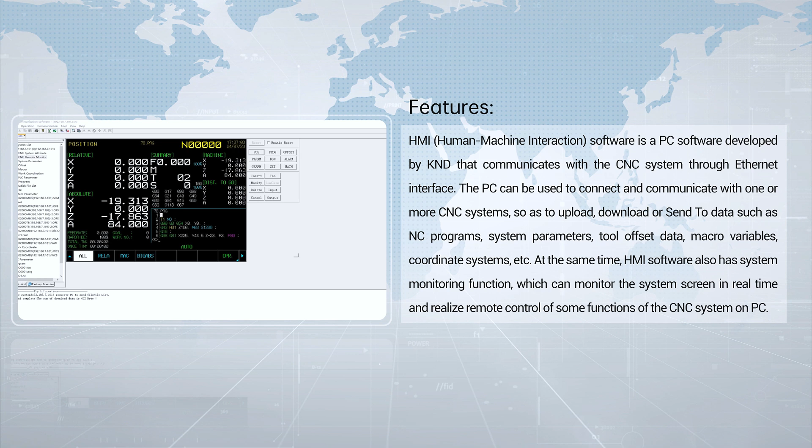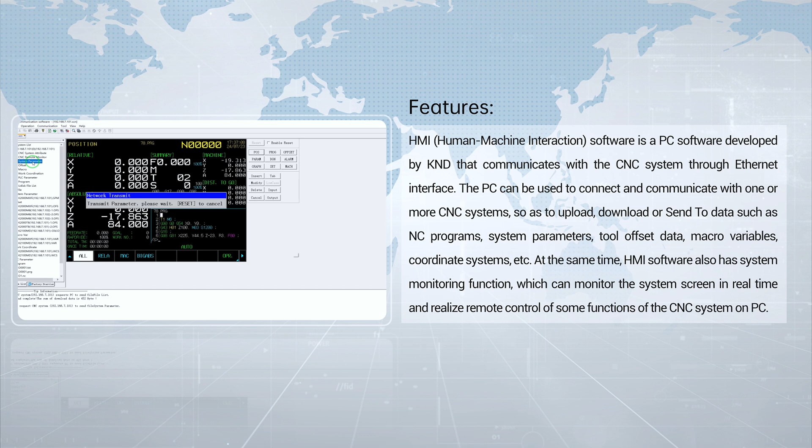HMI software is a PC software developed by KND that communicates with the CNC system through Ethernet interface. The PC can be used to connect and communicate with one or more CNC systems, so as to upload, download or send data such as NC programs, system parameters, tool offset data, macro variables, coordinate systems, etc.

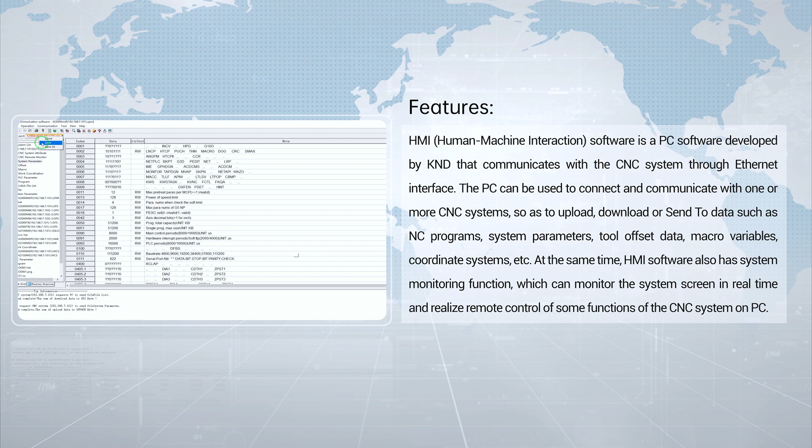At the same time, HMI software also has a system monitoring function, which can monitor the system screen in real time and realize remote control of some functions of the CNC system on PC. This video mainly explains how to establish communication between the PC and the CNC system through Ethernet, and use the HMI software to transmit system data.

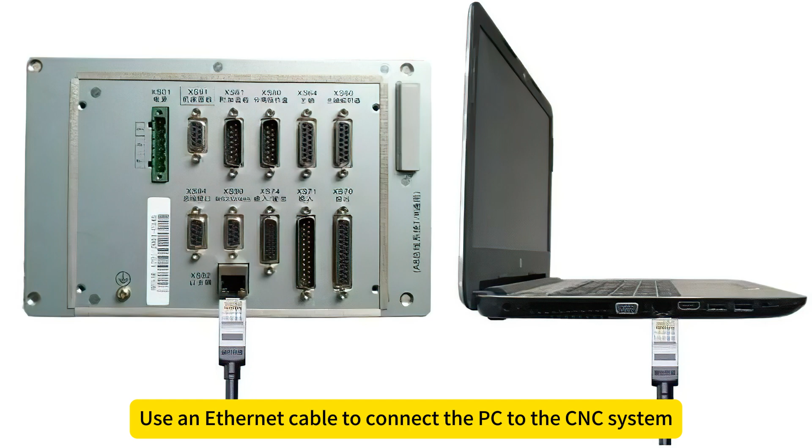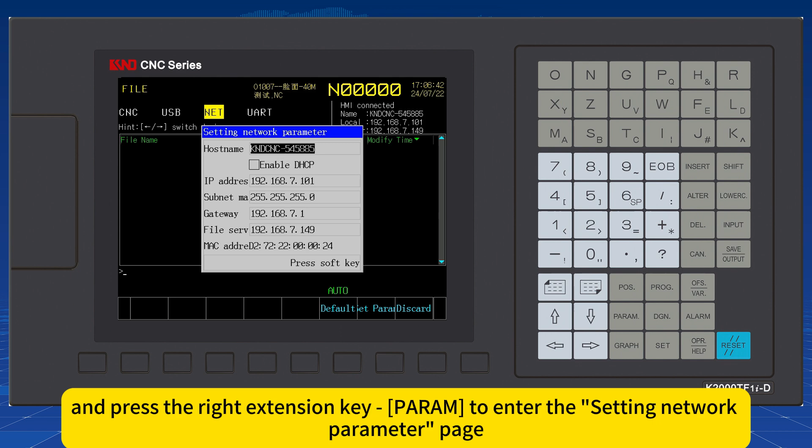Use an Ethernet cable to connect the PC to the CNC system. On the CNC system side, press PROG, file keys in sequence, then press device or the right cursor key to switch to the net page, and press the right extension key, param, to enter the setting network parameter page, where you can see the CNC system default network communication parameters.

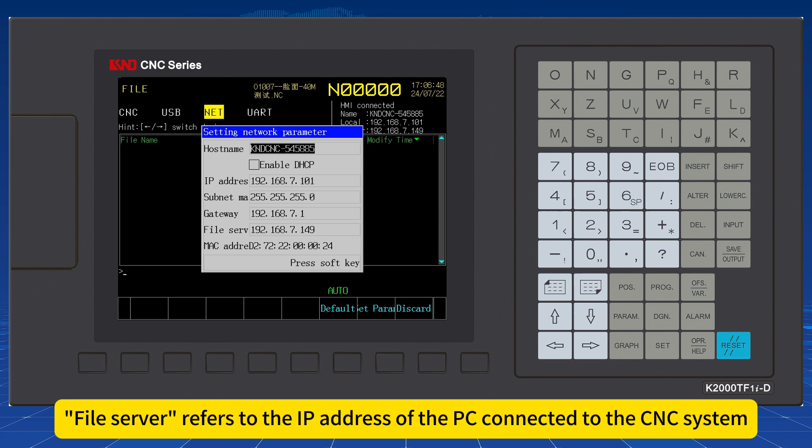Among them, IP address refers to the IP address of the CNC system. File server refers to the IP address of the PC connected to the CNC system. Enter the PC control panel, click Network and Internet, Network and Sharing Center, Ethernet. Click Properties in the pop-up Ethernet Properties window. Find Internet Protocol Version 4 on the pop-up page.

Note: 1. When the PC and CNC system are connected through a router, the PC can be connected to the router via Wi-Fi, and the CNC system should be connected to the LAN port of the router via an Ethernet cable, but cannot be connected to the WAN port. 2. When the PC and CNC system are connected to the router via Ethernet cable, they must all be connected to the LAN port of the router and cannot be connected to the WAN port.

3. The IP addresses of the PC and the CNC system must be in the same network segment, but they cannot be the same. 4. The IP address of the PC must be consistent with the IP address set in the file server on the CNC system side. 5. The subnet mask and gateway set in the PC and CNC system must be consistent.

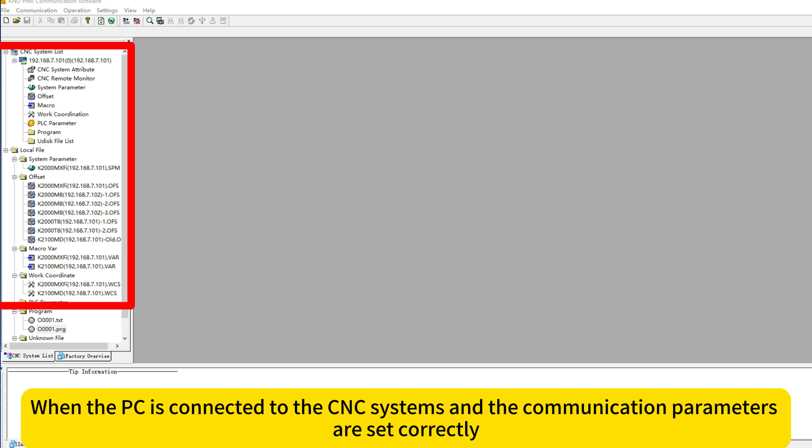After running the HMI software for the first time, when the PC is not connected to the CNC system, the CNC system list in the left workplace is empty and only local file is displayed. When the PC is connected to the CNC systems and the communication parameters are set correctly, the IP address of the connected CNC system will be automatically displayed in the CNC system list in the left workplace.

The CNC system with IP address 192.168.7.101 has been successfully connected to the PC HMI software. Right-click the IP address and you can select to rename the CNC system as you wish.

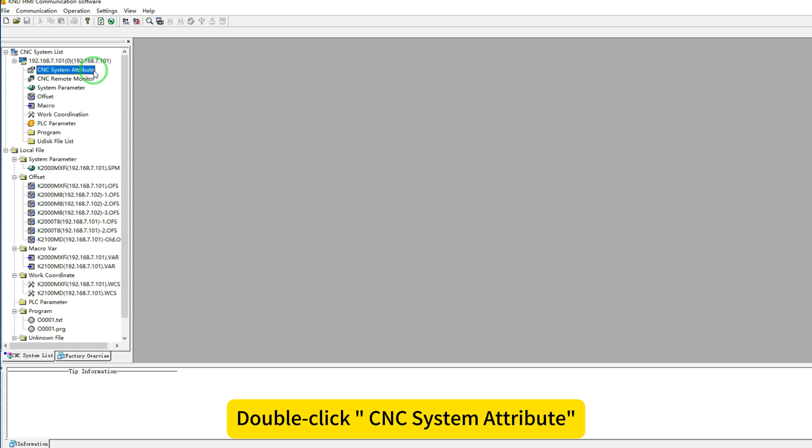Each connected CNC system contains the following items as follows. CNC system attribute. Double-click CNC system attribute. The software will pop up the CNC system status info dialog box as shown below, which will display the CNC type, software version, connection status, and IP address of the currently connected CNC system.

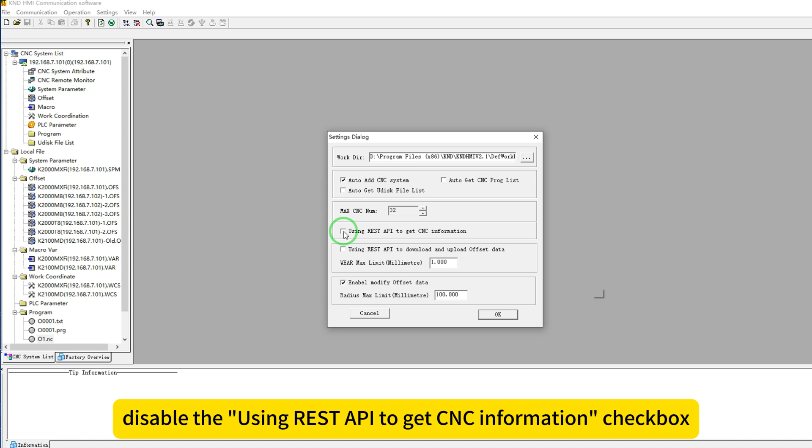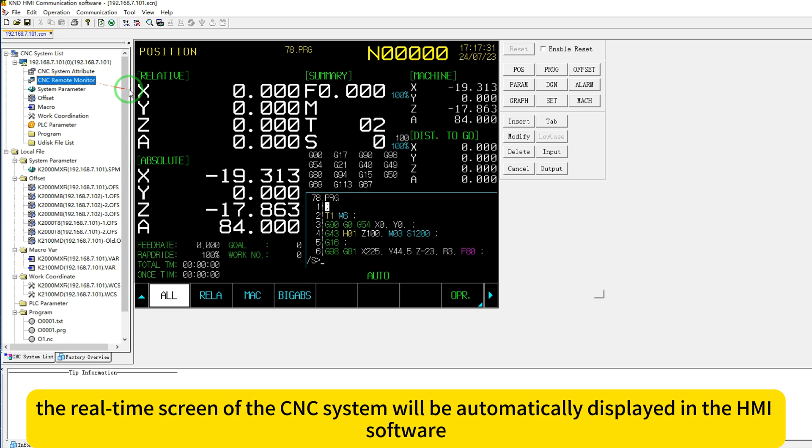CNC remote monitor. Click Settings, Settings in the menu bar to open the settings dialog of the HMI software, disable the Using REST API to get CNC information checkbox, and then click OK. At this time, double-click CNC Remote Monitor. The real-time screen of the CNC system will be automatically displayed in the HMI software, and some buttons will be displayed on the right of the screen.

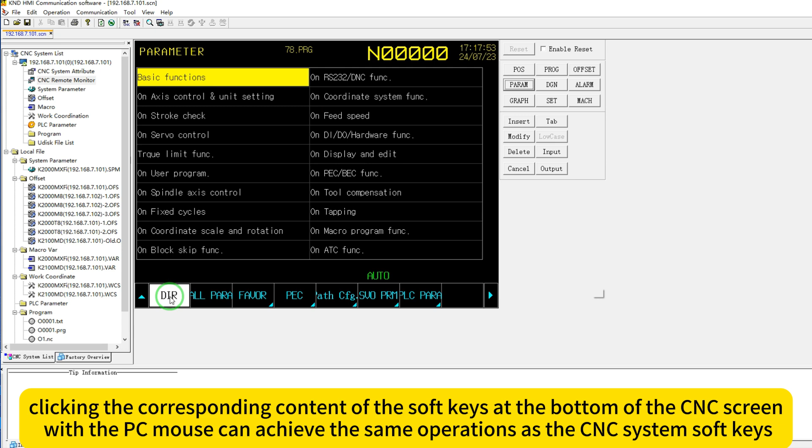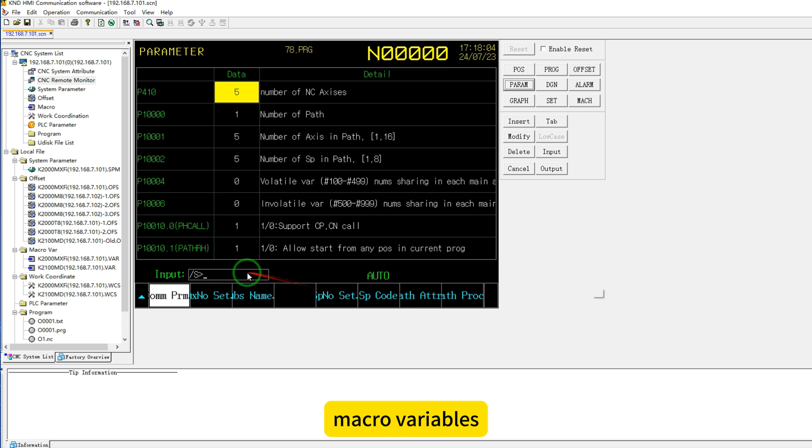The functions of these buttons are the same as those of the corresponding buttons on the MDI panel of the CNC system. Clicking the corresponding content of the soft keys at the bottom of the CNC screen with the PC mouse can achieve the same operations as the CNC system soft keys. At the same time, matching with the PC keyboard, you can view, edit and modify the machining program, parameters, offset, macro variables, coordinate system, ladder diagram, and other operations in the system through the HMI software.

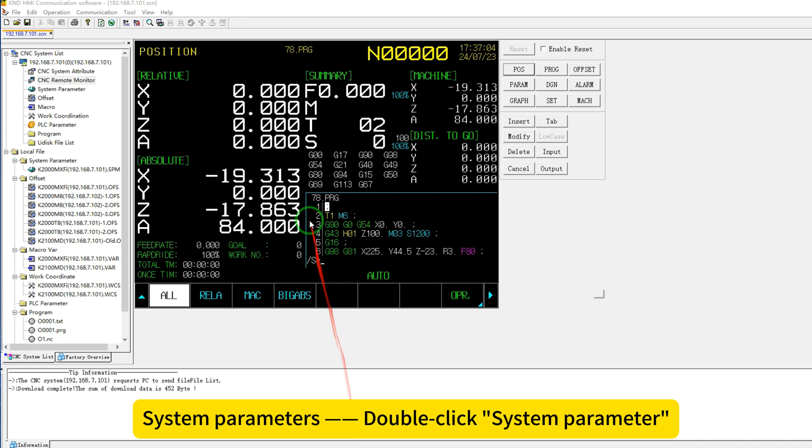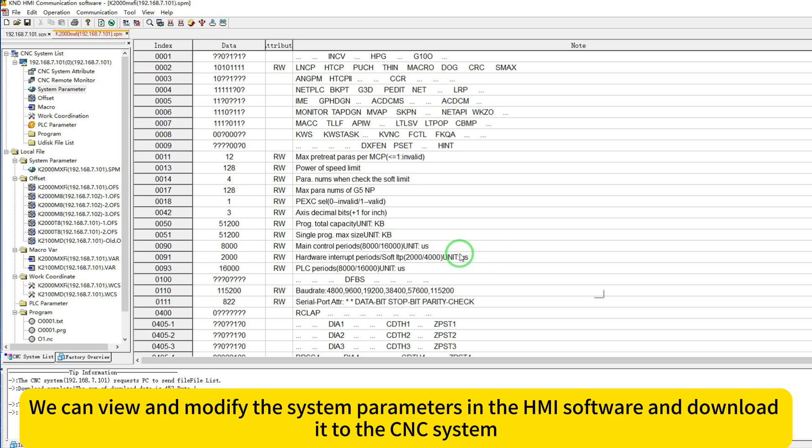System parameters. Double-click System Parameter. The system automatically uploads the system parameters to the HMI software and opens it. The suffix of the system parameter file is .SPM. We can view and modify the system parameters in the HMI software and download it to the CNC system. Right-click the system parameter file and you can select Close, Save or Save As.

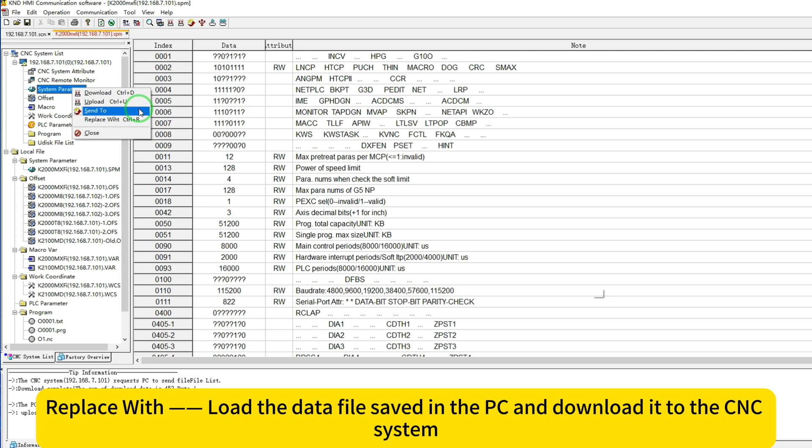Right-click System Parameter in the workplace, and in the pop-up dialog box, you can select Download, Upload, Send to, Replace with, and Close. Download: send data files from the PC to the CNC system. Upload: send data files from the CNC system to the PC. Send to: send data files from the PC to other CNC systems in the same network. Replace with: load the data file saved in the PC and download it to the CNC system. Close: close the data file in the HMI software.

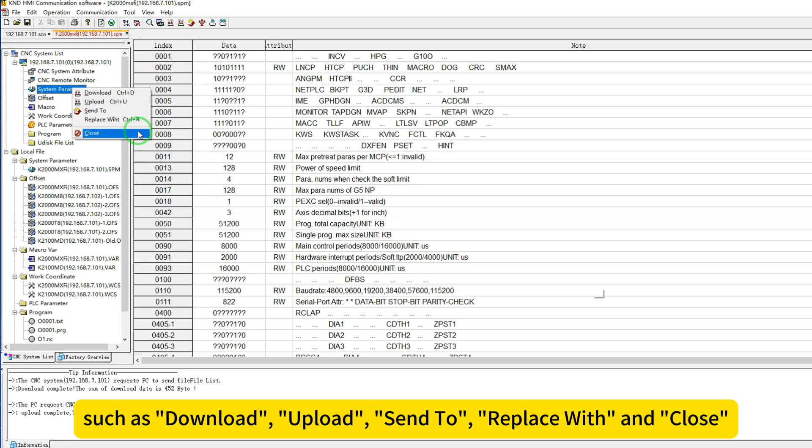The operations of offset, macro, and work coordinate are the same as those of system parameter, and all support operations such as download, upload, send to, replace with, and close. PLC parameter: reserved function, not supported yet.

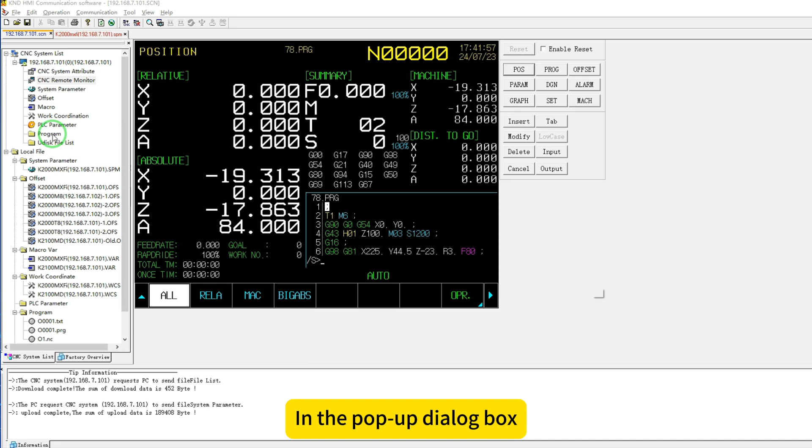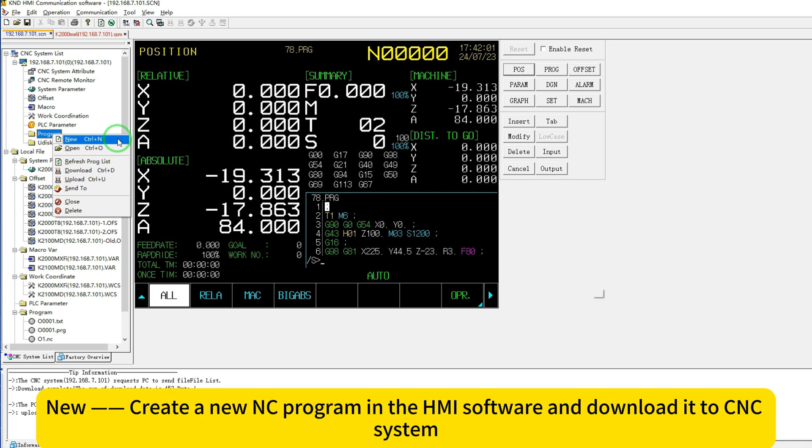Program. Right-click the program in the workplace. In the pop-up dialog box, you can select New, Open, Refresh Prog List, Download, Upload, Send to, Close, and Delete. New: create a new NC program in the HMI software and download it to CNC system. Open: open the NC program saved in the PC and download it to CNC system.

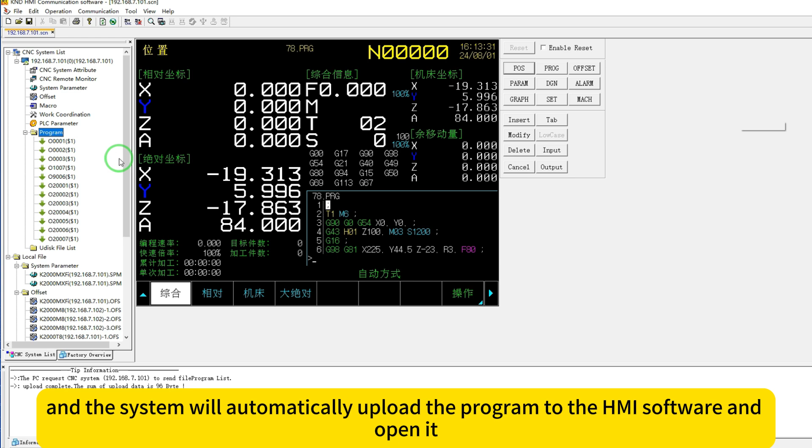Refresh Prog List. After clicking Refresh Prog List, all NC programs in the CNC system will be displayed in the program directory. Double-click any program with the mouse, and the system will automatically upload the program to the HMI software and open it. Delete: used to delete the program in the program directory.

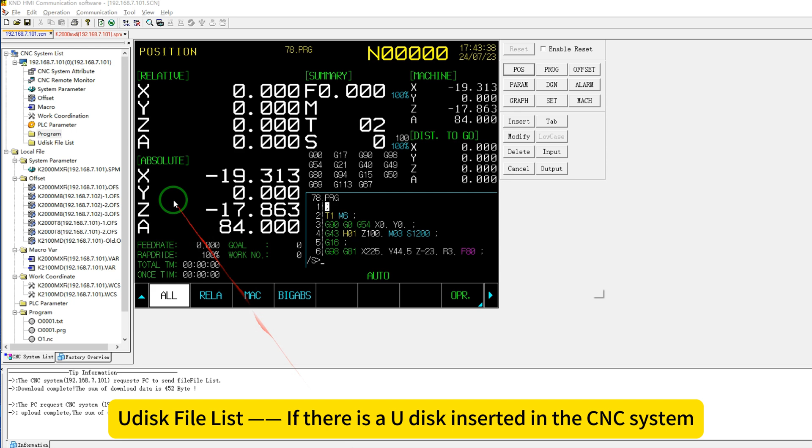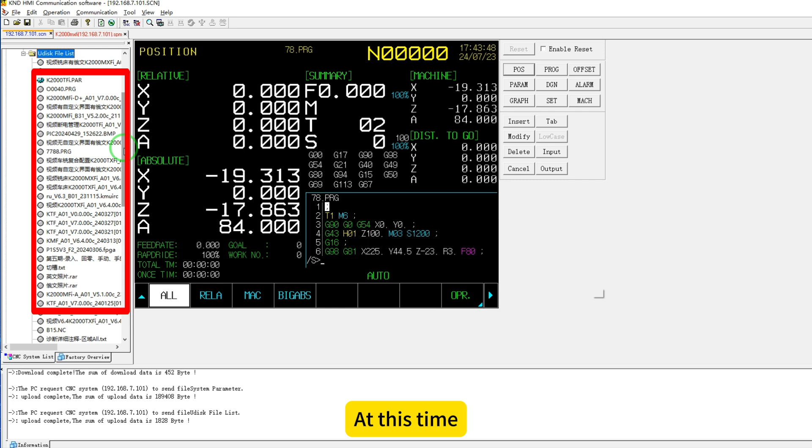UDisk file list. If there's a UDisk inserted in the CNC system, right-click UDisk file list and select Refresh File List. At this time, all files in the current directory of UDisk will be automatically displayed under the UDisk file list in the form of a list. Right-click the file under UDisk file list. You can select to upload and save it to the HMI software working directory on the PC.

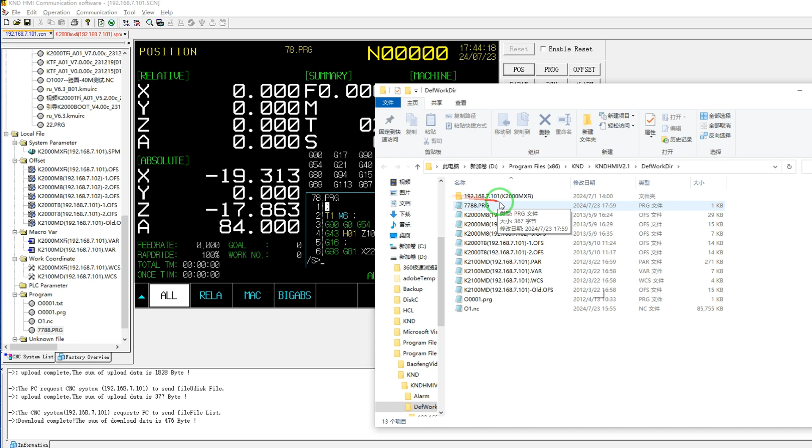Click Settings, Settings in the menu bar to open the settings dialog of the HMI software. You can see the work dir. This working directory is used to save data files downloaded from the CNC system to the PC. The default working directory is in the installation directory of the HMI software. Click the selection key and you can select a proper working directory as you wish.

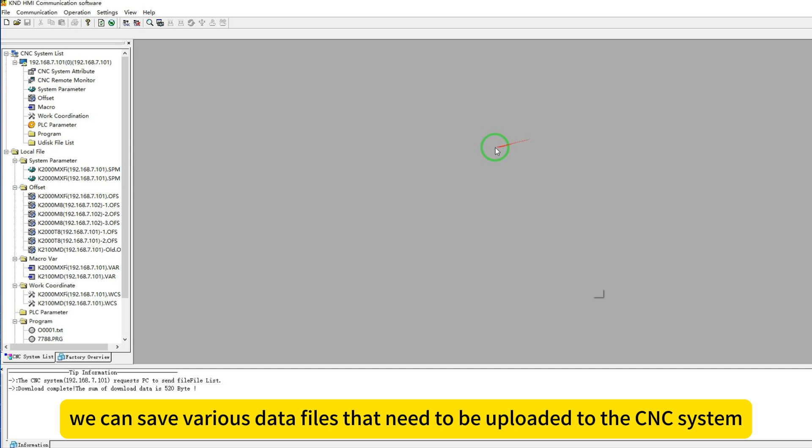After setting the working directory, we can save various data files that need to be uploaded to the CNC system, such as system parameters, offsets, macro variables, working coordinate system, NC programs, etc. in the working directory. These data files will be automatically refreshed and displayed in the local file directory of the HMI software. Right-click these files and you can choose Open, Download, Send to, Close, and Delete.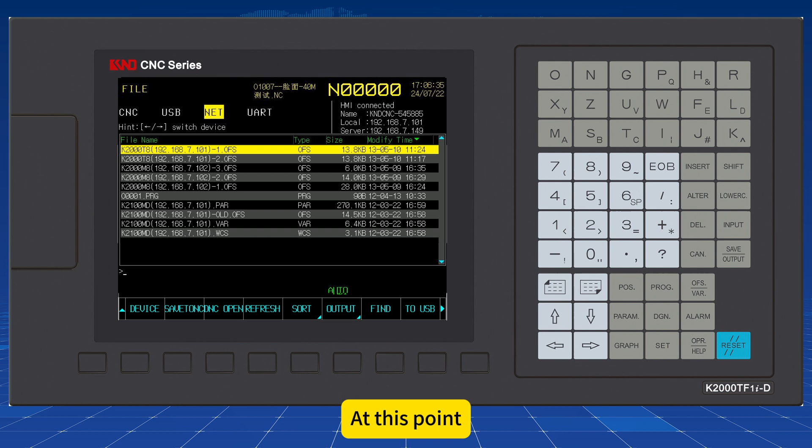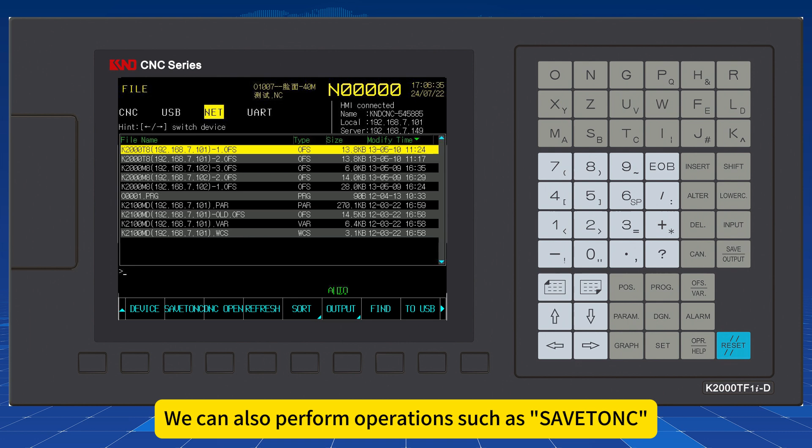At this point, enter the system net page, and the data file saved in the HMI software working directory will also be displayed on the screen. We can also perform operations such as save to NC, DNC open, refresh, sort, output, find, to USB disk on these files on the system side.

Tip information area. The tip information area below the HMI software is mainly used to record and display the transmission information when transmitting data between the PC and the CNC systems.